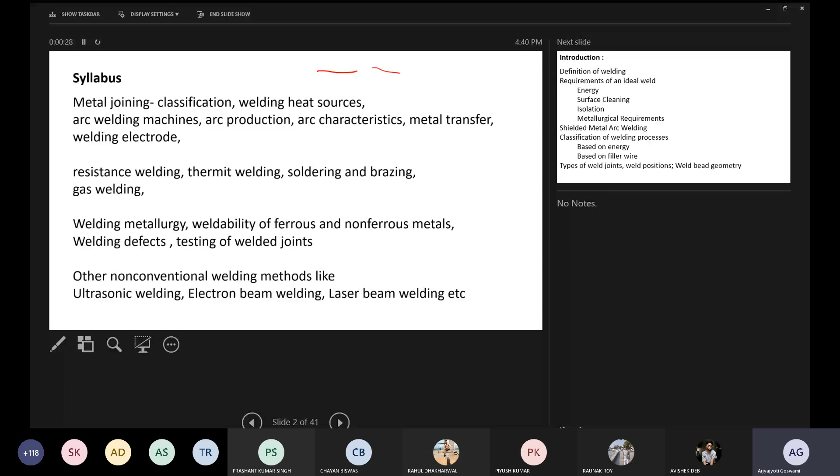Okay, fine. So today we'll start with the welding portion. As I've told you, I'll be discussing welding mainly, and some part of forming also. How much of forming I have to cover, maybe I'll have to cover all of it, but we'll decide that later. First we'll do the welding portion.

So the first chapter of welding - if you look at the syllabus it is not that precisely defined, but for our purpose we will define it very precisely. We'll talk about the definition of welding, then the requirements of an ideal weld. So whenever I say welding, what is meant by that? What do I mean by a welding operation?

What are the four requirements so that a particular operation can be called a welding operation? We'll see that, and then talk briefly about SMAW. SMAW is the most common form of welding. There are many variants of welding available in industry, but shielded metal arc welding, SMAW, is the most common. If you've seen welding around your place, by the roadside, or in any hardware shop, most of it is SMAW. A few will be gas welding - these two are the most commonly seen forms of welding. There are other specialized forms, but they're not as common. I'm sure most of you have seen SMAW or gas welding at some point. We'll discuss what these mean.

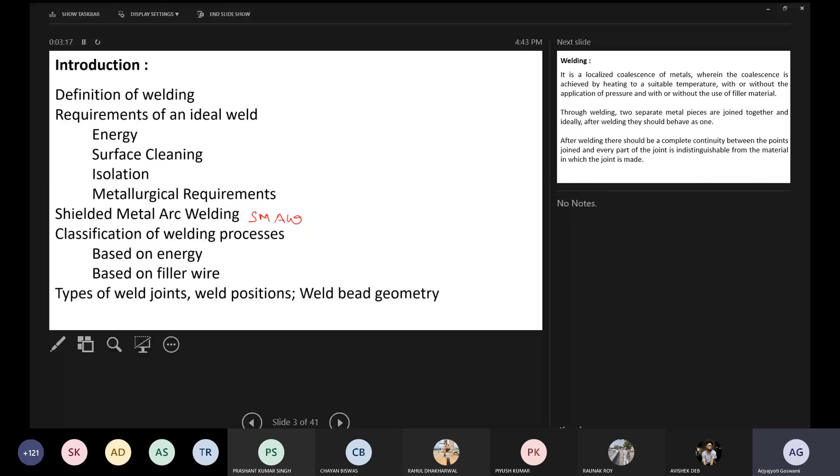Okay, so today we'll start with the definition first. Whenever I say welding, the first thing that comes to your mind is that welding is a joining process, right? So the next question is, if welding is a joining process, how does it differ from other joining processes? The common answer is welding is a joining process, but it is a permanent joining process.

When I say permanent joining process, that basically means if you want to break that joint, you have to damage the part. Theoretically, the joint cannot be broken, but practically anything can be broken or cut off - that's not a big issue. The point is, a thing will be called a permanent joint if, in order to break it or remove it, you have to damage the part also. So welding is a permanent joining process.

The definition shown here is given by the ASTM, American Society for Testing and Materials. This is the ASTM definition. Also, the American Society of Welding, ASW, follows this definition: welding is the localized coalescence of metals.

They mentioned metals because welding was defined long back. Nowadays we know welding is not only about joining metals. Welding can join non-metals also, two plastics, a metal and a plastic, or of course metal and metal. So welding is first and foremost a localized coalescence of metals. In place of metals, you can write materials also, right? Materials is the more correct word, but metals will not be wrong either.

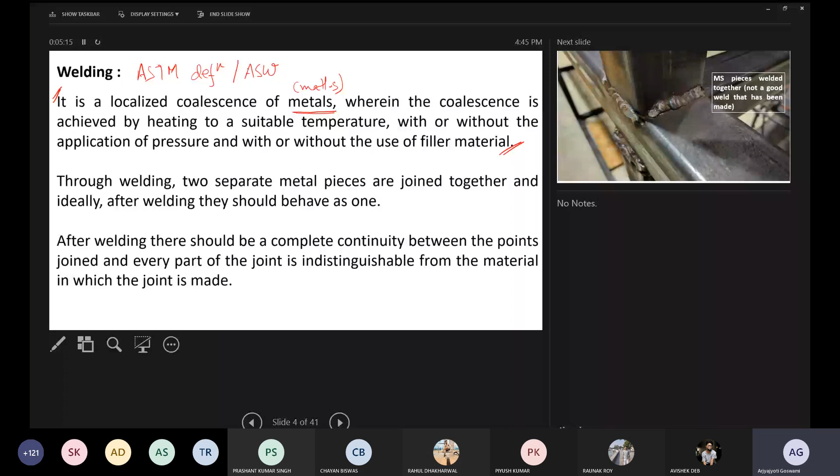Welding is a localized coalescence wherein the coalescence is achieved by heating to a suitable temperature. This means that in any welding process, there is a heating mechanism involved. Either we can have heat from a flame, called gas welding, or heat from an electric arc, called electric arc welding, or heat from electric resistance. We know resistive heating is I-square-R-T heating, so that is called resistance welding. There are so many other classifications, which we will talk about later.

Coalescence is achieved by heating to a suitable temperature. This suitable temperature, most commonly, is the melting temperature. Suitable is not a very technical word, it's just an English word. Some variants exist: in solid state welding, which we'll talk about later, the heating does not need to occur till the melting point—welding can be done without melting. Those are a different class of processes, which is why they used the word 'suitable' here. If we're talking about electric arc welding, it will be melting temperature, but if we're talking about friction stir welding, the temperature won't be melting temperature—it will be something below that.

With or without the application of pressure, and with or without the use of a filler material. Pressure means that if you are applying pressure on the faying surfaces of the parts being joined, that is with application of pressure. And if you are using any external material, that is called a filler material. So either you can use a filler material, or you should not use one—it is up to you.

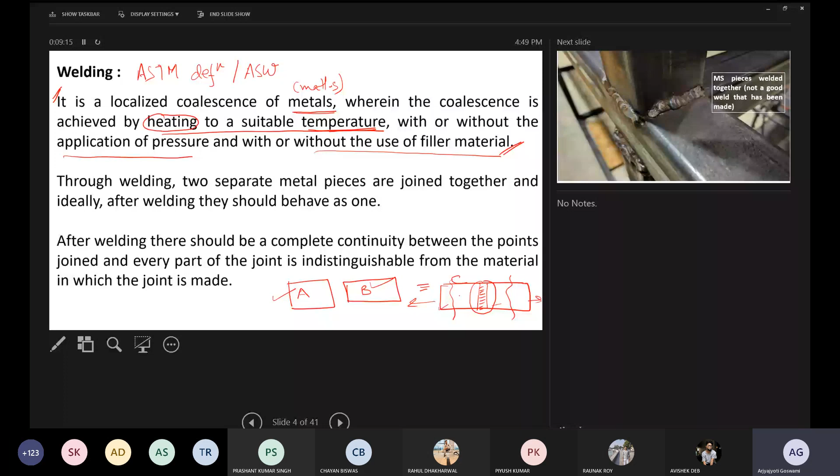So these are some examples. Here we have some MS plates, MS pieces - MS means mild steel pieces. These are two MS pieces, part one and part two. After joining, you can see the weld bead has been deposited like this. So much spattering has taken place, so many blowholes are there. You can observe some undercutting also, where the material is not able to fill the gaps properly, and lack of penetration is there. So this is an example of a bad weld.

MS, mild steel, by itself is a very good candidate for welding. If you want to practice welding, you should always start with MS because it has very good weldability - it can be very easily welded. But even then, the person who was doing it could not do it properly. This is an example of a bad weld.

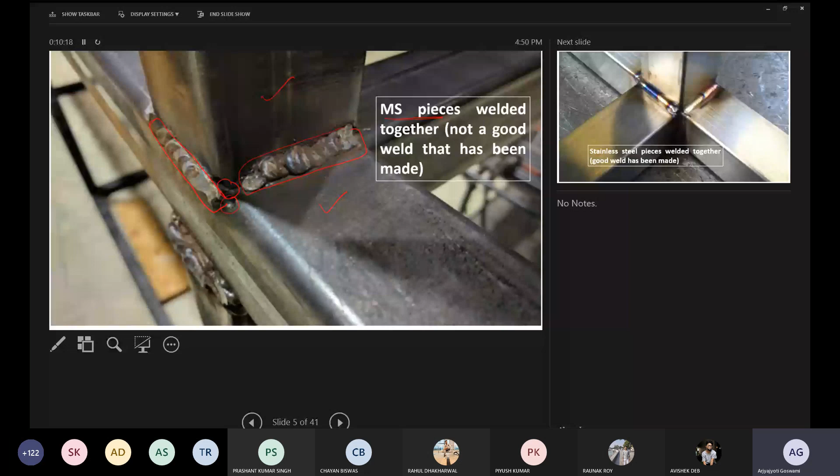So next image, here we have SS pieces - SS means stainless steel pieces. So many pieces are there, and here the joint has been made. SS is a very difficult component to weld. Welding stainless steel is very difficult because stainless steel is not thermally conductive, so whatever heat you are giving is not dissipated and it distorts the part. So it is a difficult thing to do welding of stainless steel.

But even then, the person who was doing it, he could do it very properly. You can see that even though you can distinguish that the welding joint is there, still some sort of continuity is there. In such type of welding, if you apply the load, the part will not fail from the welding portion - it will fail from somewhere else. So this is an example of a good welding.

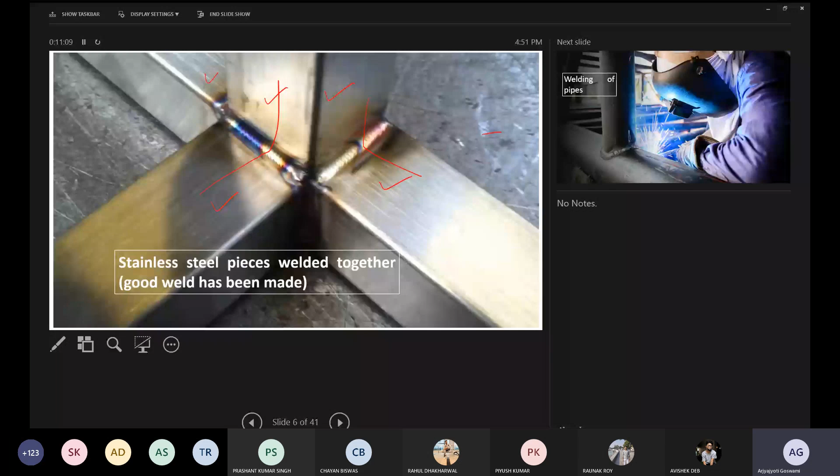This is some other picture which I could find - this is a welding of pipes. So welding of plates and welding of pipes, these are the two most common applications of welding. In industrial applications, when we talk about industrial welding processes, most of the time we are concerned with joining two plates or joining pipes. For different type of pipe materials and pipe dimensions, we use different type of welding processes.

We'll get to that later. So this is just to show you, here we have one vertical pipe, and here we have the horizontal pipe. The person who is doing the welding has done the welding here. Of course, you can see that this is not a very good welding - some cracks you can observe here. In such conditions, if you apply the load, the welding will fail. So this is not a very good type of welding.

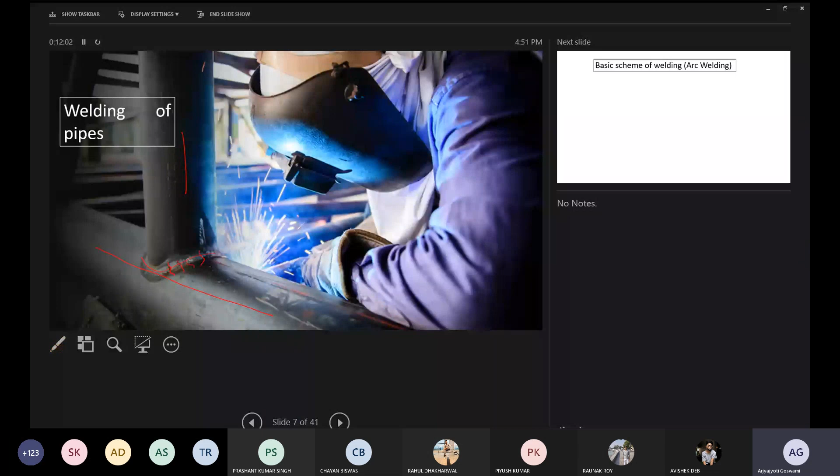So the basic scheme of welding - whenever we talk about welding, most of the time you will refer to roadside welding. Roadside welding, also called SMAW welding, is an example of an arc welding process. So let me write SMAW.

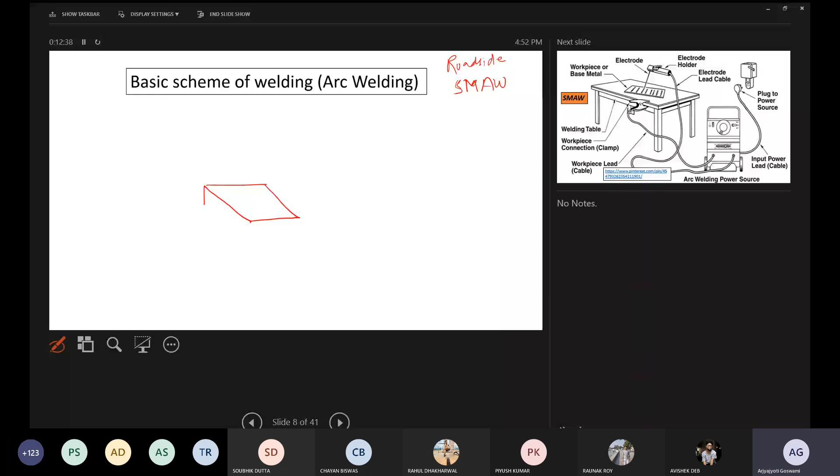So in case of SMAW, we have a plate like this, and you have another plate like this. Suppose this is plate A, this is plate B. Plates A and B are called workpieces, also called base plates - these are the surfaces where the welding has to be done.

Suppose I want to make a butt joint over here - lap joint, butt joint, I will discuss later also, and you may be knowing, since last class you told me you have done some welding in the labs. So if I want to make a butt joint, the surfaces which are to be joined - for plate A this is the surface, and for plate B this is the surface. These surfaces which are to be joined are called faying surfaces.

Throughout the course, whenever I say faying surfaces, you should realize I am talking about those surfaces which will be joined through the welding process. So this is a faying surface.

In case of SMAW, we have an electrode holder. In the electrode holder, we fix the electrode and it is connected to some power supply. The base plate is also connected to a power supply, whether it is connected to positive terminal or negative terminal, we'll see later. There is a concept called straight polarity and reverse polarity. We'll understand that, so I don't want to confuse you right now.

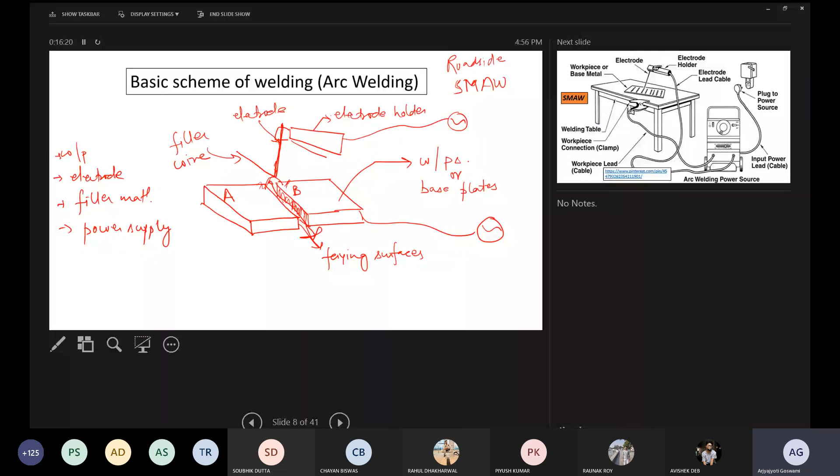Maybe from this diagram it will be much more clearer. Here is the base plate or the workpiece or the base metal on which we are doing the welding. This schematic you can refer to your first year, you could have done the welding process in the lab, you could have faced a similar scenario there. There is a work table on which the workpiece or the base metal is kept. We have the electrode holder inside which the electrode is fixed.

Electrode holder and the base plate are connected to the power supply, which is connected to the power source, and other things like lead cables and so many others. So this is the basic schematic of SMAW process. SMAW stands for shielded metal arc welding. It is called a shielded metal arc because the electrode is a metal wire and the metal wire is covered with some kind of coating, we'll discuss these things later. The purpose of showing this slide is just to enable you to visualize what welding looks like, and these are the basic components of the welding process.

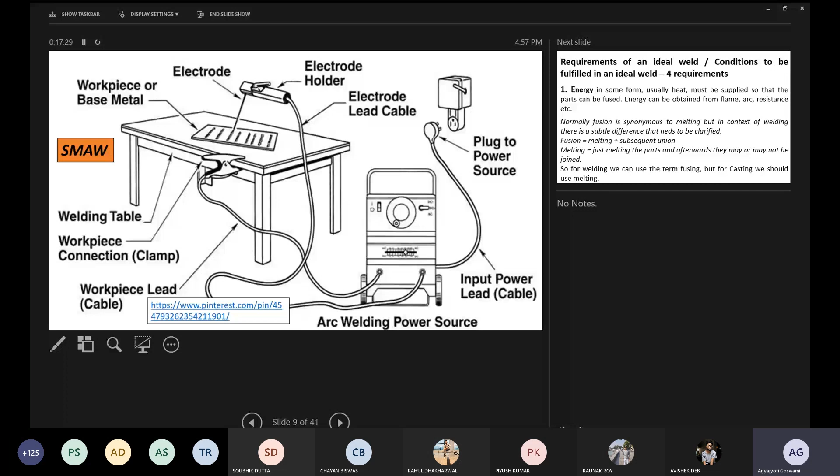Now we'll talk about the requirements of an ideal weld. Ideal weld means the welding which is satisfying all the required criteria for the process. There are basically four requirements as per the definition of AWS or the American Welding Society, and most experts, almost all experts, agree that in order for a process to qualify as a welding process, it should have these four features.

The first feature which any ideal welding process should have is that it should have some sort of energy introduction, energy in some form should be supplied. In case of arc welding process, the energy will be obtained from the electric arc. In case of gas welding process, heat energy will be obtained from the flame. In case of resistance welding process, it will be from the resistive heating and so on.

Any welding process, whether it is fusion welding, arc welding, resistance welding, or solid state welding, should have introduction of energy in some form. We have to provide some sort of energy. Without providing the energy, you cannot carry out the process, right?

Also in this slide, I have given a distinction between fusion and melting. Fusion means the parts are being melted and they are getting joined also. So in case of welding, we'll use the term fusion. Fusion means the faying surfaces of part A and part B, they are melting and later they will be getting joined also. So that thing we can call fusion welding.

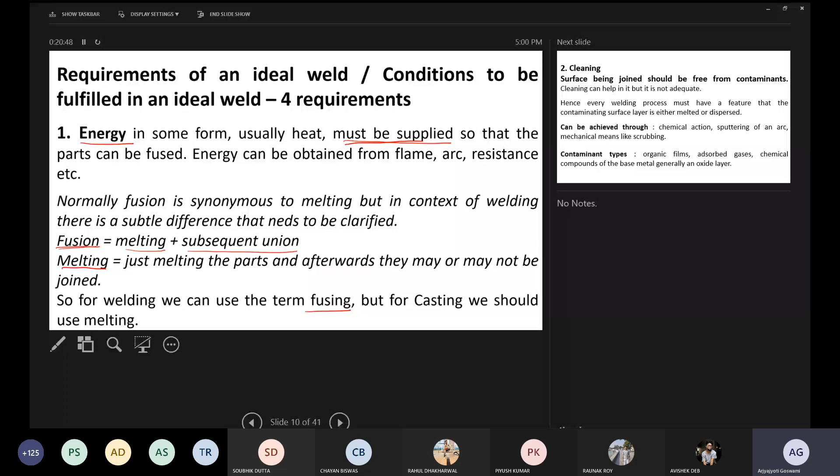So the first requirement of welding is energy should be provided. Second thing is cleaning. Any process will be called a welding process if the parts which are being joined are cleaned first. The cleaning can be through chemical action, most commonly using a chemical called acetone or isopropyl alcohol.

Cleaning can also be through sputtering of an arc, or it can be through mechanical means like scrubbing. Mechanical cleaning is the cheapest and simplest form of cleaning available, and sputtering cleaning is the most sophisticated.

If you're dealing with a highly complicated or highly reactive part, for example titanium, it very easily forms an oxide layer. So titanium has to be cleaned through sputtering first. After you clean the titanium, then you should do the welding process. So the characteristic of an ideal welding is that the parts being joined should be cleaned first.

What is the meaning of sputtering of an arc? Sputtering is basically a momentum transfer phenomenon. I will tell you what it means.

Suppose you have a surface like this, an aluminum plate. Aluminum has a tendency that if you put it in open air, it forms a layer of oxides on it. So on top of aluminum, we have a layer of aluminum oxide, alumina, Al2O3. If you try to do welding of this, it won't be very good welding. You are using the process parameters and electrodes for aluminum, but basically you are starting with an alumina layer, so of course the process will go wrong.

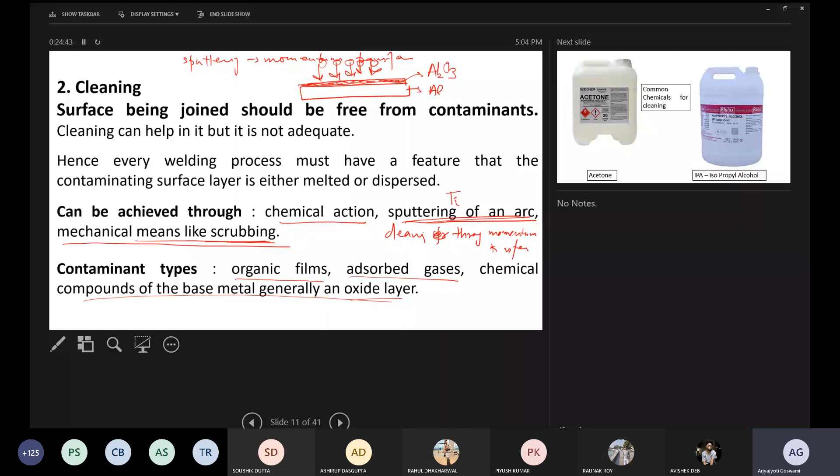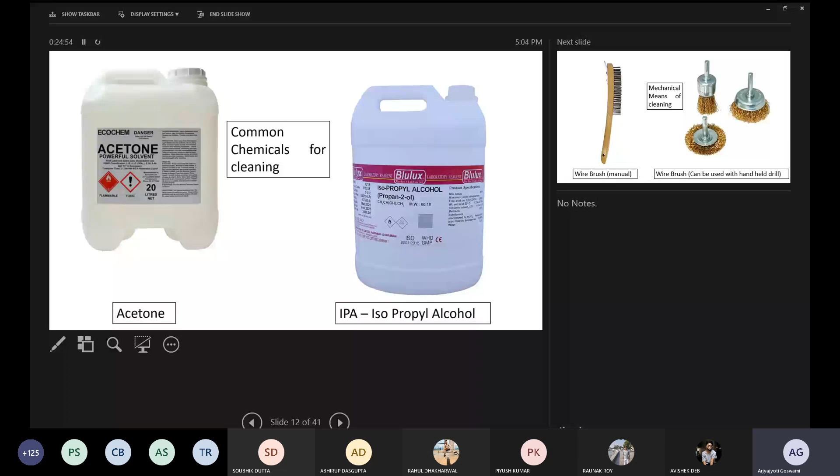So I told you, for chemical cleaning, most of the time we use acetone, isopropyl alcohol - these things are very commonly available and very cheap. If you are doing mechanical scrubbing, you can use a wire brush, which you could have seen in your lab work. The wire brush can also be used along with a hand drill, so you can use this for cleaning smaller portions, not very big parts.

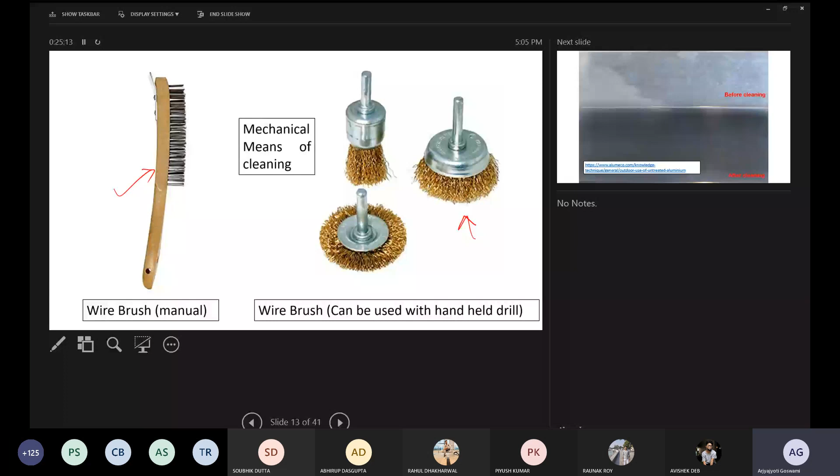If you are doing it for a very non-critical application, suppose for particular lab work, just to create a joint, you need not bother about it much. You can clean it using manual methods and then do the welding - maybe GMAW or GTAW, whatever you want. Of course some layer of oxide may still form, but it won't be that detrimental, and it won't have much effect on the final product.

But if you are using it for a critical application - suppose you are welding titanium for spacecraft application - there you should not take any chance. There you should do the cleaning in a vacuum and do the welding in a vacuum, and then everything is fine afterwards. So, the second thing in case of welding is that the part should be cleaned.

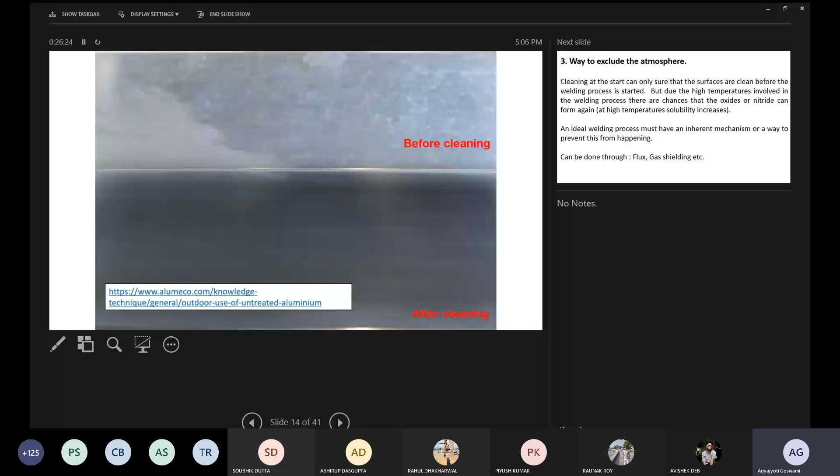The third thing in case of a welding process is the way to exclude the atmosphere. Any welding process should have an inherent feature that during...

Is someone saying something? Any question is there or what?

So the third thing in case of welding is a way to exclude the atmosphere - that even after cleaning, during the welding also the part may get contaminated. If you are doing welding not inside a vacuum, if you are doing it in open air, then the part may get contaminated - either some contamination in the form of gases or contamination in the form of dirt or slag. So any ideal welding process must have a way to exclude the atmosphere, so that once the part has been cleaned, it remains clean. A welding process will be considered ideal if it has an inherent mechanism or way to prevent contamination from happening.

So it can be through flux or through gas shielding. Flux means whatever flux is being used will dissociate and form a gas. So either you can get the gas from the flux or you can directly use the gas. This is the first example, in case of SMAW. When we talk about SMAW, we'll discuss this - that in SMAW we have an electrode coating, and one of the functions of the coating is to generate gas. The coating generates the gas.

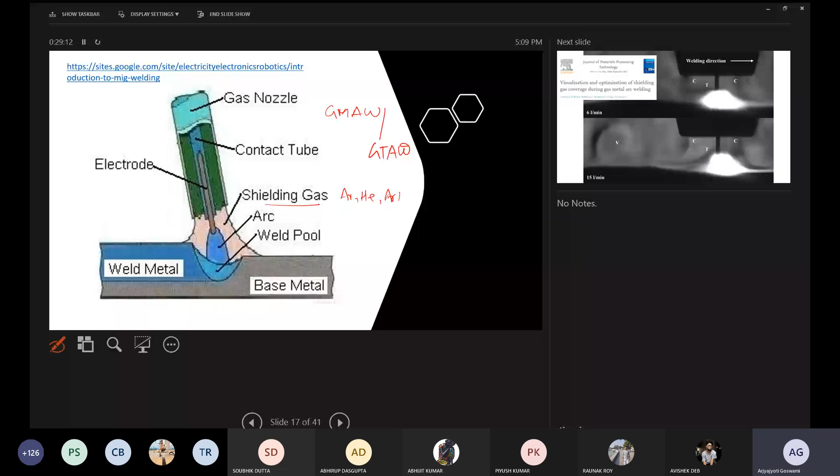This is just an example which I wanted to show you, taken from a research paper, showing what it looks like in practicality, what the shielding environment looks like. Here you can see an arc has been formed between the electrode wire and the base plate, and a shielding has been provided - maybe argon gas - and it is shielding. Here you can also see it is forming a sort of covering vortex layer around it.

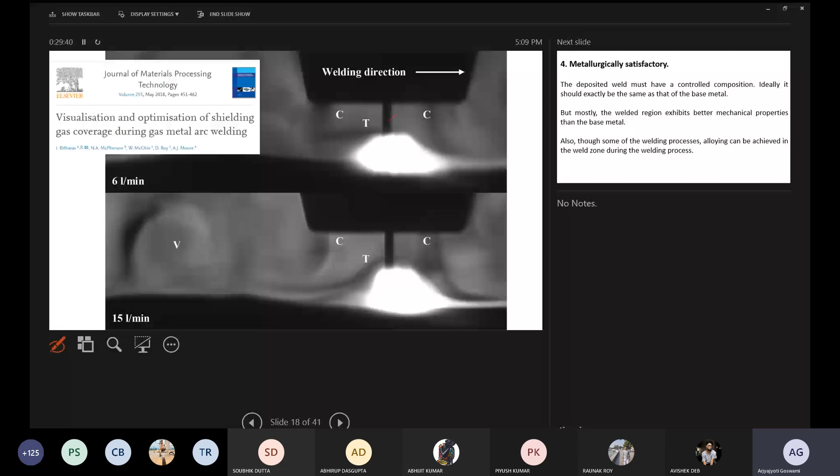And the last thing, requirement of an ideal weld: it should be metallurgically satisfactory. Metallurgically satisfactory means the weld which has been deposited should have a controlled composition. Ideally, the composition of the weld should be exactly the same as that of the base metal.

If you recall the first slide which we saw today, in which we talked about the definition of ideal welding, I told you there should be no difference between the welded parts - part A and part B - after welding it should behave as a single part. So metallurgically, there should not be any difference between the parts being welded and the joint formed. Ideally, metallurgically, there should not be any difference. But practically, of course, it cannot be achieved 100%. But we try to go as close to it as possible.

What happens is, if you are doing the welding process correctly, using the correct parameters and the correct methodology, most of the time the welding region performs better than the base metal. I told you the welding region will not fail - even if you apply the load, the failure will take place from somewhere else, the welded joint will not fail. So sometimes the welding region is more than satisfactory, having better metallurgical properties compared to the base metal.

So again, if we come back to this, here you can see the first requirement of the welding process was energy. Energy is taken from the electric power supply, which is converted into an electric arc, and the heat from the arc is used for the welding process.

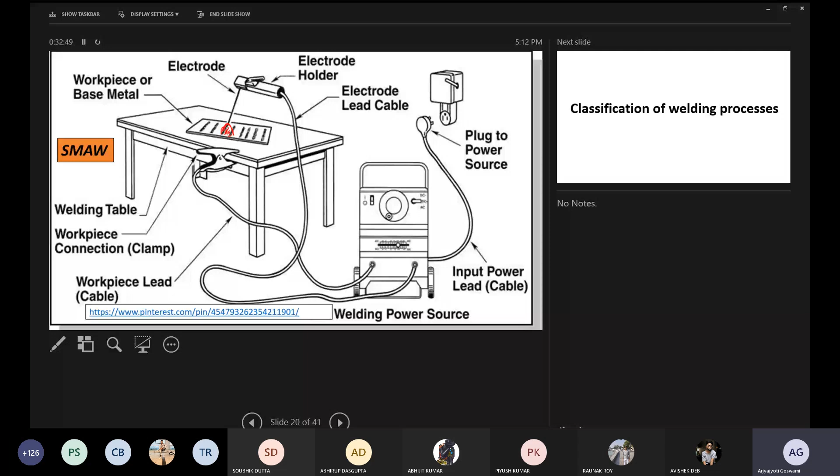Before we stop for today, I want to start the classification of welding. The first one is as per the source of energy. We have talked about this so many times during today's lecture, so I think we can cover it today.

If the source of energy is flame, then it is called oxyacetylene welding or oxy welding. These full forms you should remember, and I hope throughout the course you will remember it yourself. You don't have to memorize it - just O for oxygen, A for acetylene welding. When you do gas welding, you will remember it by heart.

As per source of energy, there are four sources through which welding can be done. Either energy from the flame, that is oxyacetylene welding or oxy welding, or energy obtained from the electric arc - shielded metal arc welding, gas metal arc welding, gas tungsten arc welding, submerged arc welding, electroslag welding, electro gas welding, plasma arc welding, atomic hydrogen welding, and flux core arc welding.

I understand I am saying these names continuously and you may be finding it difficult to remember, but don't worry, I will be giving the full forms to you. I hope that at the end of the course you will also be able to tell these names very quickly without any hesitation.

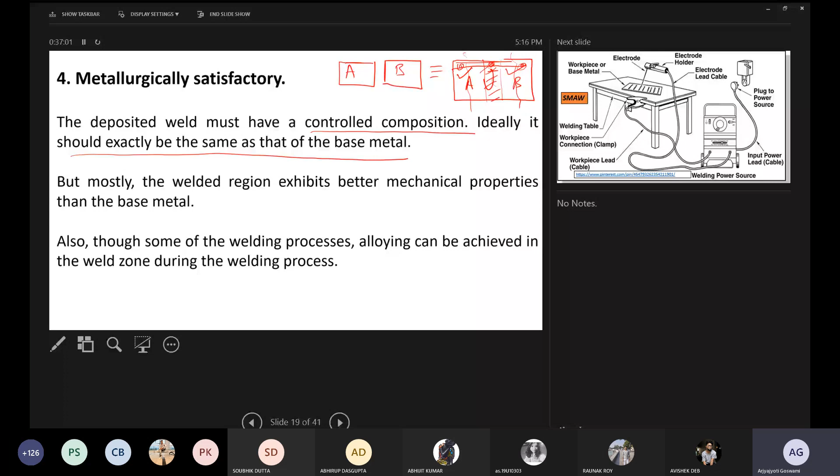How is it protected from contamination during the gas welding process? During gas welding, sir, I told you there are 2 methods by which contamination can be prevented. Suppose I am talking about the oxidation problem - oxidation will occur only if oxygen is able to enter the metal zone and combine with the metal, forming the oxide. Similarly, if nitrogen is able to enter, it will form nitrides.

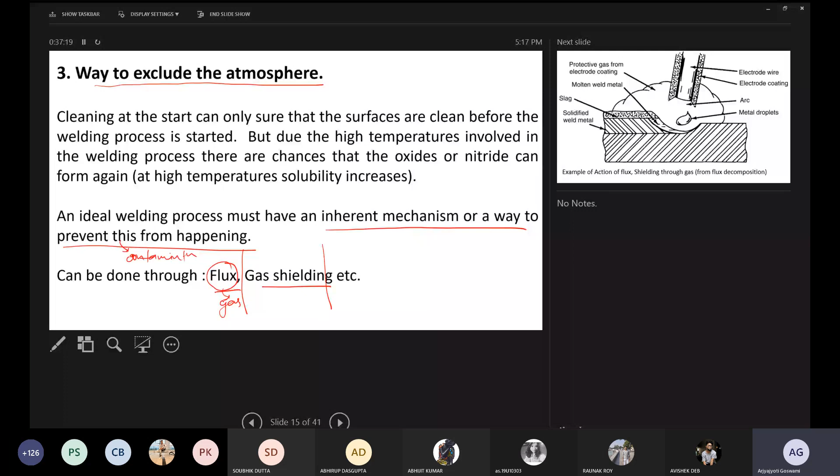But if we generate a shielding environment, where the gas covering has been made, now atmospheric oxygen or nitrogen cannot enter the weld zone. If they cannot enter, they cannot form oxides or nitrides. If they cannot form oxides or nitrides, they cannot contaminate. So shielding is the third step, sir, if you remember.

First, in the cleaning step, we have removed the contaminations, and then we are shielding it. How is shielding made to prevent contamination? Elaborate on this - what does shielding mean? No, sir, he is asking that the gases that are formed must not react. How is it formed?

Understood. Let's see what happens in SMAW welding. In SMAW welding, we have a metal wire - this is a cross section of the SMAW welding. We have this metal wire, and it is provided with a coating. If you remember from lab work, electrodes look like this - they have a metallic end, and then a ceramic sort of coating on top, a flux sort of coating. So when the arc is struck between the base metal and the tip of the metal wire, the heat of the arc melts the base metal. That is well known, you can realize this. It melts the base metal as well as the electrode wire.

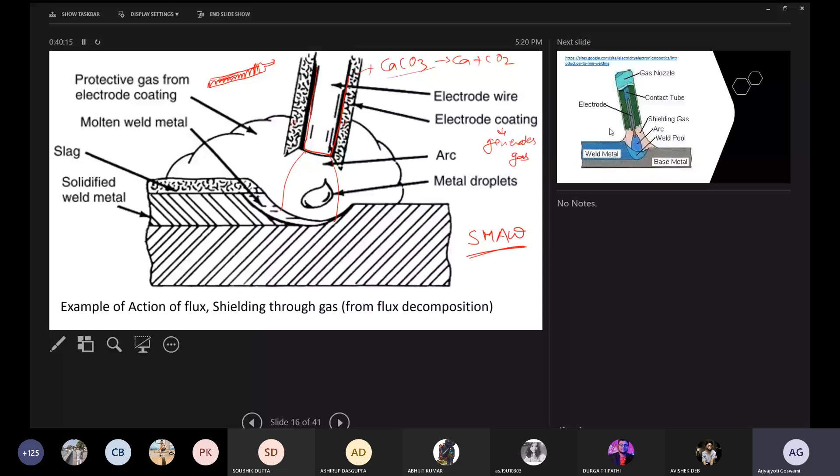Sir, will you send us the full forms of the terms you mentioned a few minutes ago, that this will be covered this semester? I will be sending it, but at the end of this course, and before that I won't ask it in any exam, so don't worry about that. My idea is after you read about these welding processes, you won't need me to send these full forms.

Let me do this course, let me explain the subject, and let you people also just listen to it and read about it. I don't think you will need these things - you will be able to work out the full form yourself later. We will discuss it so much now that you will be able to remember it. If not, then at the end of the course, I'll send it to you also. This is not a big thing. Okay, anyone else?

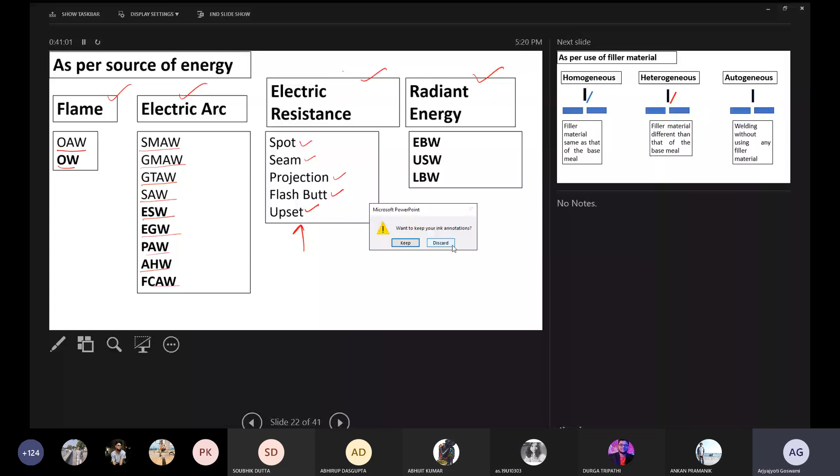Sir, do you suggest any books for this course? Yes, sir, for welding. Yeah, maybe I'll write it in the MS team, from there everyone can refer - I forgot to put it in the slides.

In case of welding, there are a few books I can mention. There is a book by O.P. Khanna, called Welding Technology, and there is a book by P.N. Rao, Manufacturing Technology - there are 2 volumes, 1 and 2. One of them is for machining, one is for welding, casting, forming, so for manufacturing technology 1 you can follow P.N. Rao. Then there is a book by R.S. Parmar, Welding Technology Volume 1 - R.S. Parmar also has written 2 volumes, the first for welding technology, the second for welding metallurgy.

Okay, so I have written it in the MS team, from there you people can refer to these books. Can we follow the Ghosh Mallik book, Manufacturing Science? Of course you can follow it, and you will get the basic idea of welding there, but the thing is Ghosh and Mallik is too much research oriented. So if you're reading welding for the first time, I will say don't read from Ghosh and Mallik. Maybe later, if you do the advanced welding course which I take for 7th semester, that time I will ask you to follow Ghosh and Mallik. Don't read welding for the first time from Ghosh and Mallik - read it from O.P. Khanna, R.S. Parmar, P.N. Rao. These are good books to start with.